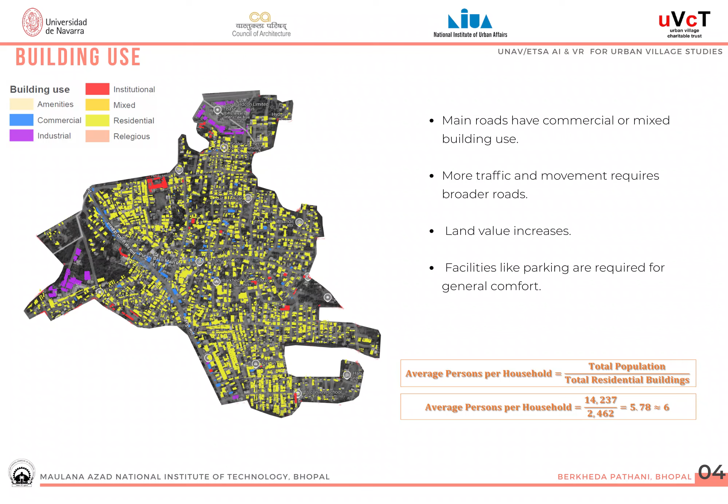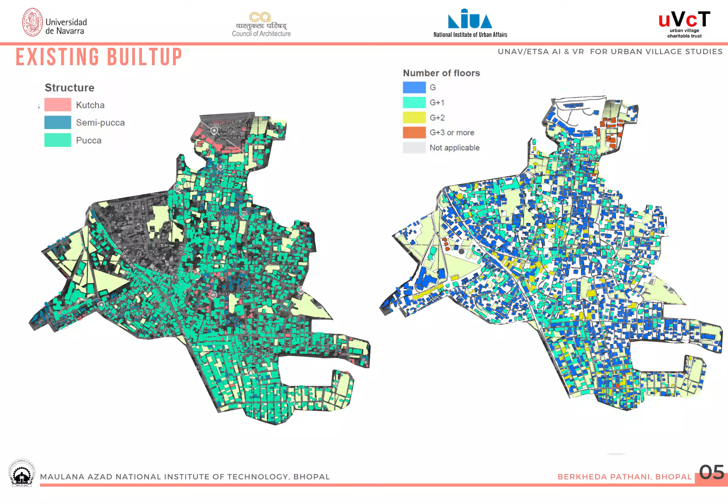Main roads feature commercial or mixed-use buildings, attracting higher traffic and pedestrian movement. This calls for wider roads to manage flow efficiently, as accessibility improves and land values rise, making these areas more desirable. With increased activity, essential facilities like parking become critical to ensure convenience and comfort for residents and visitors alike.

Buildings along major roads in this area are mostly pucca and limited to ground or G+1 floors. Government institutions like schools and anganwadis are typically single story, while private ones often have multiple floors. Newer constructions, especially mixed-use buildings, usually have 2 or more floors, with commercial on the ground and residential above. Industrial buildings, however, are often kutcha and temporary.

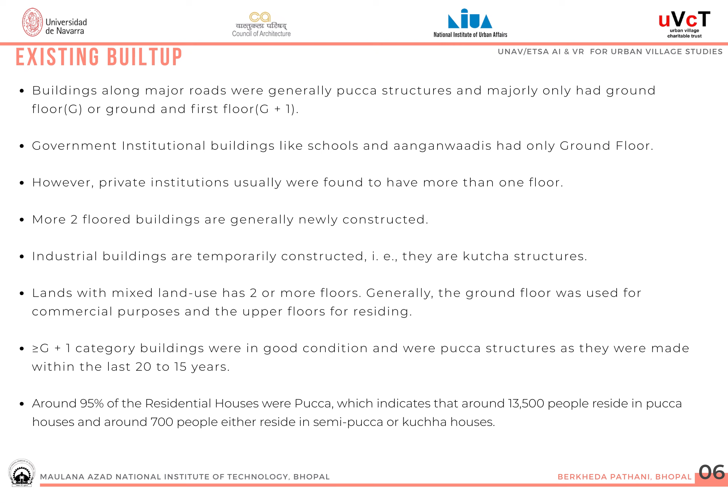Overall, 95% of residents, around 13,500 people, live in pucca houses, reflecting strong structural development in the area. Now let's have a look at the housing conditions in Barkheda. The housing conditions in this area vary across 4 categories.

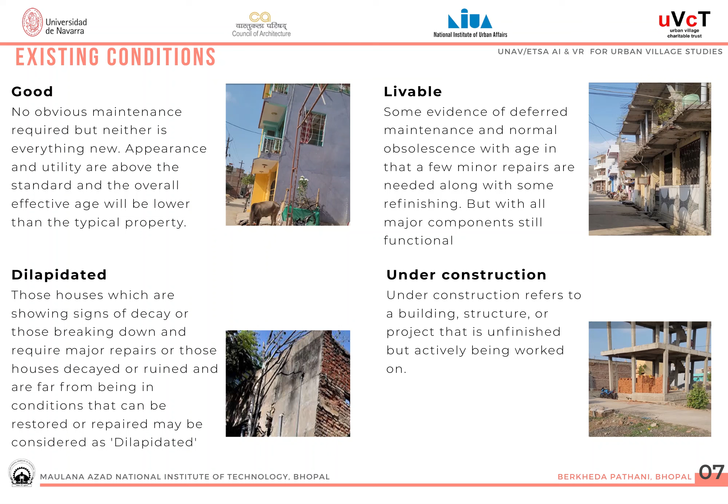Good homes are structurally sound with above-standard utility and appearance. Livable houses may show signs of aging or minor repairs but remain fully functional. Dilapidated structures are severely damaged and require major repairs, often beyond restoration. Lastly, under-construction buildings are actively being built but not yet complete, indicating ongoing development in the area.

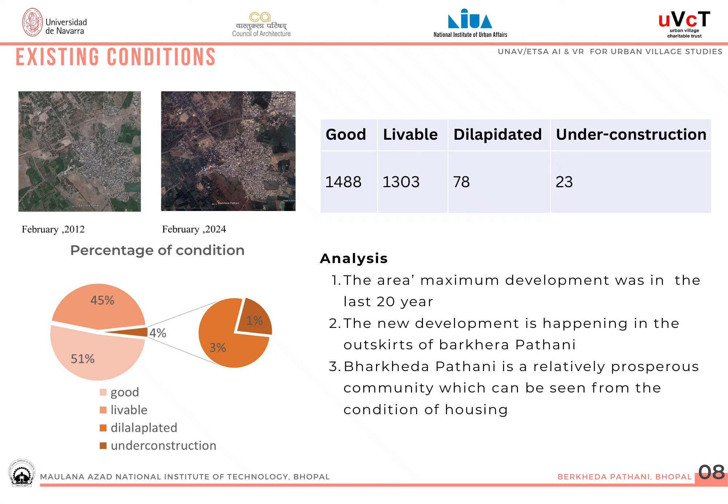As we can see in the image from 2012 compared to that of 2024, a major difference can be seen. The intensity of infrastructure and public common spaces have more prominently emerged in the area. According to the pie chart, approximately 51% of homes are structurally sound, about 45% are livable, and 3% are dilapidated.

Under the UNAV/ETSA initiative for urban village studies using AI and VR, we analyze the existing conditions in this area. Public buildings are government owned and managed, while private buildings belong to individuals or businesses. Historically, most residents lived in the northern and southern ends of the area. Over the last 20 years, settlement gradually expanded into the central parts, reflecting organic urban growth and evolving land use patterns.

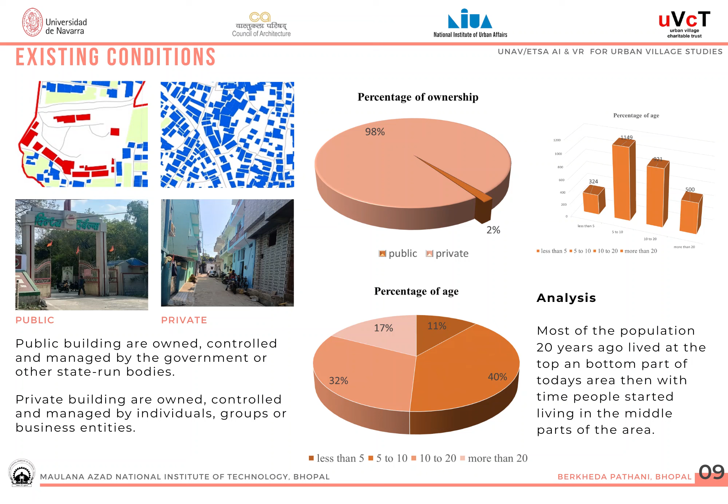Now, talking about transportation and public accessible areas, road widths in Barkheda range from 1 to 9 meters, with most falling between 2 to 5 meters. Roads are categorized into primary roads of 6 to 8 meters, secondary roads of 3 to 5 meters, and tertiary roads of 1 to 2 meters. The total road length is approximately 25.3 kilometers.

Notably, roads just 1 meter wide restrict movement to only bicycles and two-wheelers, limiting access for larger vehicles in certain parts of the area.

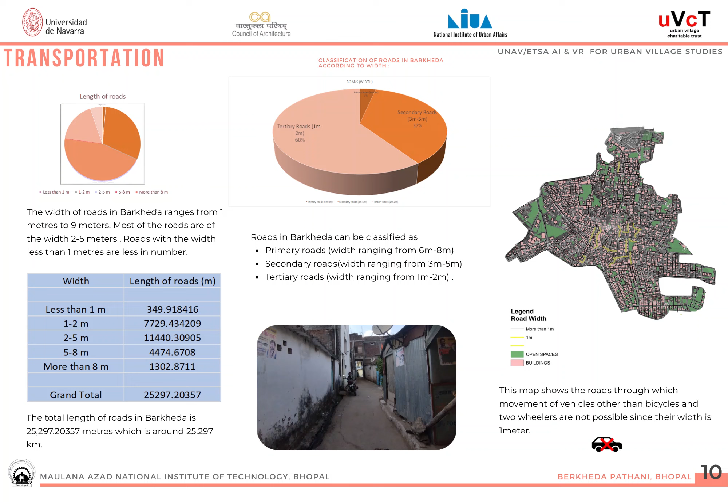As per the URDPFI guidelines and the Bhopal Development Plan, Barkheda's roads are classified into arterial, subarterial, sector, and local roads. Right of way varies; local streets range from 12 to 20 meters, while national highways require a minimum of 90 meters.

Most roads in Barkheda are paved with concrete, and street parking dominates the area, with vehicles commonly parked along the roadsides. A few areas offer off-street parking, but even there, street parking remains the norm.

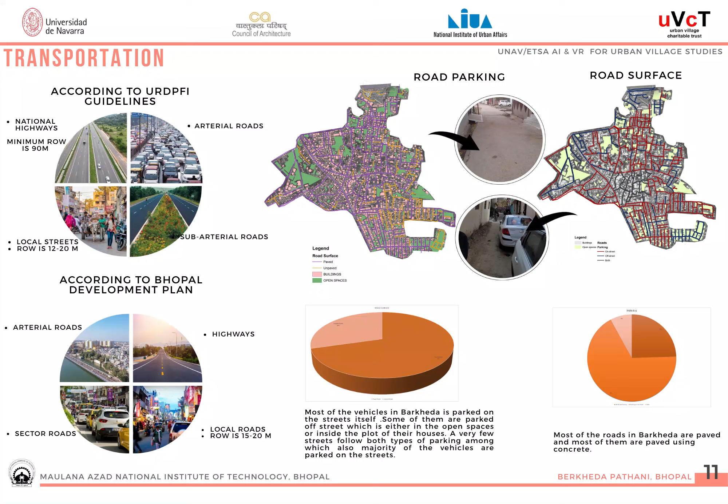Now let's explore the different sections of the road in Barkheda. Understanding the classification and design of these road sections is essential for planning traffic flow, infrastructure development, and urban growth in the area.

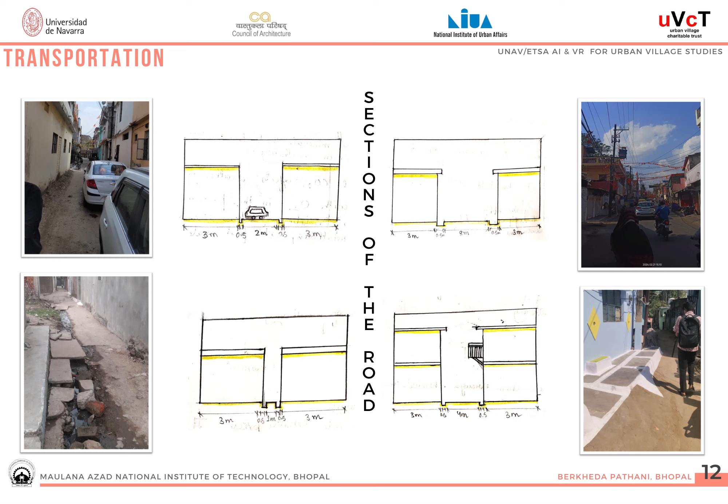So let's have a look at some data we have collected from the area. The total population of Barkheda was around 14,237, with 277 families having either bicycle, two-wheeled, or four-wheeled vehicles for transportation. This survey found that the number of four-wheelers is less due to the width of road.

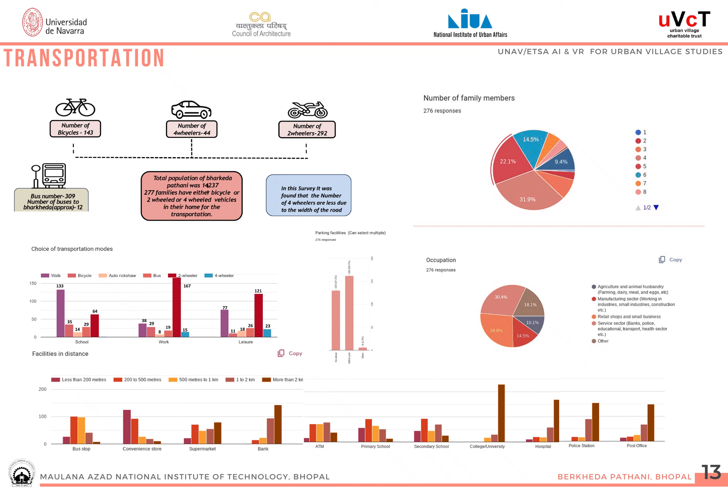Apart from this, we have collected various data by analyzing the different professions and their preferred mode of transportation in the form of pie charts and bar graphs, as we can see.

The social infrastructure includes the policies, resources, and services that support productive, social, and economic activities such as education, healthcare, and social services. Barkheda has a population of around 14,237 people living in approximately 2,462 residential buildings, excluding mixed-use buildings. Institutional buildings, including schools, clinics, and ward office, total 48, making up just 2% of all buildings in the area, highlighting the balance between residential and essential social facilities.

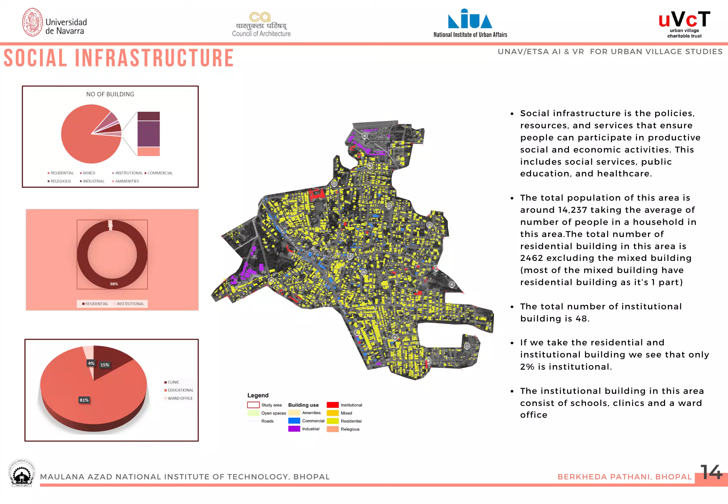Barkheda has approximately 4 clinics, with an urban primary healthcare center just 600 meters away and AIIMS located 2.1 kilometers from the area. While URDPFI guidelines don't require a dispensary here, the growing population of around 14,000 suggests a dispensary would be beneficial.

For education, the area has more than required number of schools: over 6 pre-primary, more than 3 primary, and at least 2 senior secondary schools, totaling 22 schools, which adequately serve the community's needs.

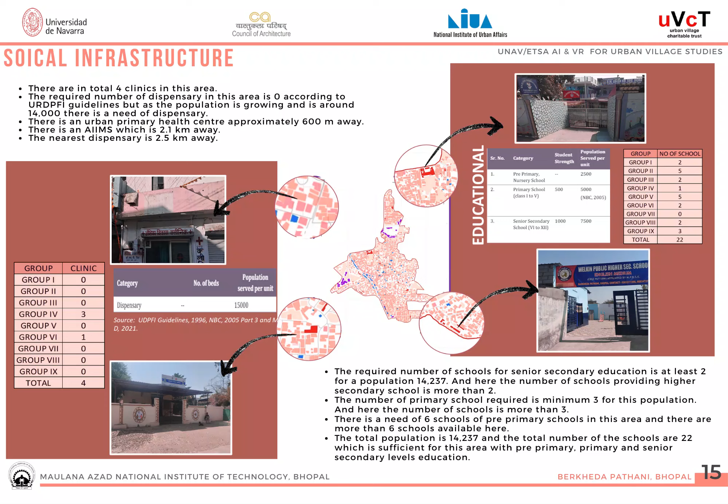Open spaces in this area are key to its urban fabric. They include regular, irregular, and incidental open spaces, the latter formed unintentionally through unplanned, random housing development. The southern part of Barkheda is more planned and features a higher number of open spaces, showing the link between planning and availability of open areas.

Many of these spaces are currently vacant plots likely to be developed soon.

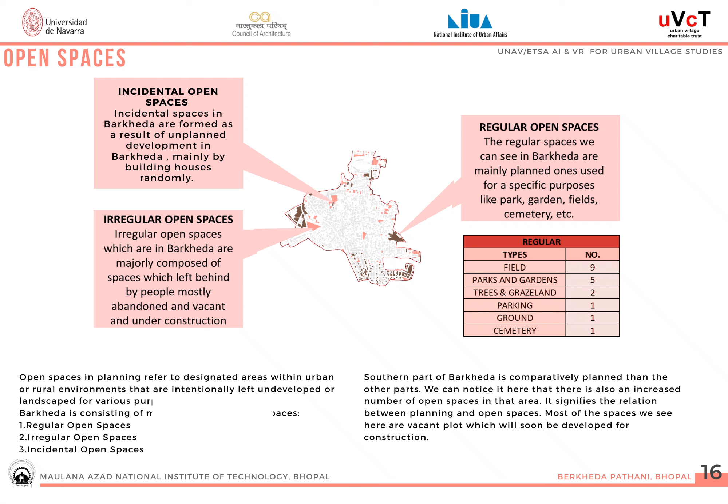Talking about the design proposals, we have proposed two projects in Barkheda: first, redevelopment of the Bajrang market, and second, redevelopment of the Barkheda ground.

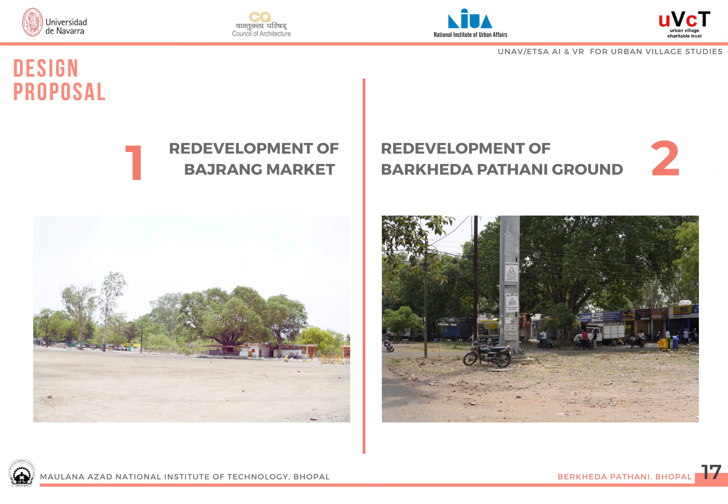The Bajrang market covers a total area of 3.9 acres, or 15,800 square meters. The site is divided into three distinct zones to optimize space and functionality. Details of the areas for Division 1, Division 2, and Division 3 will guide targeted improvements, ensuring efficient use of the site to support commercial growth and better user experience.

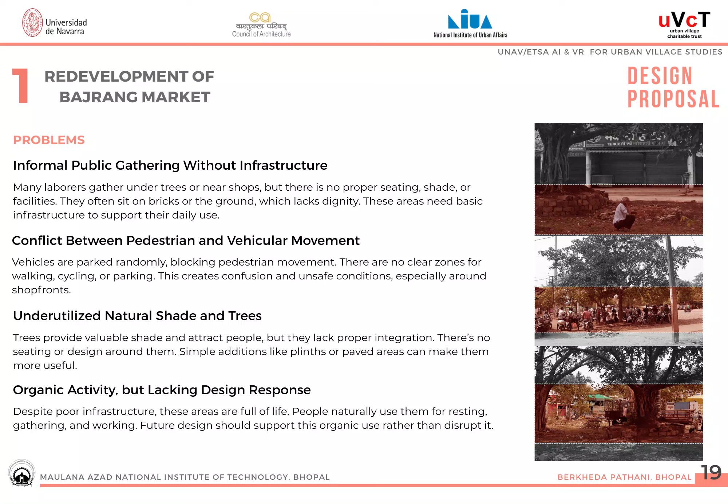The market faces several challenges. Informal public gatherings lack proper infrastructure, forcing laborers to sit uncomfortably without seating or shade. Pedestrian and vehicular movement conflict due to random parking and no clear walking or cycling zones, creating unsafe conditions. Natural shade from trees is unutilized, missing opportunities for comfortable sitting and gathering spots.

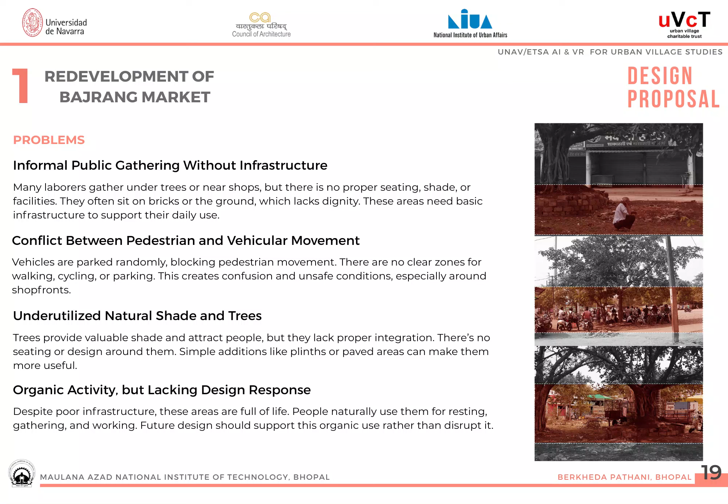Despite these issues, the market remains lively, so the future designs should enhance this organic activity while addressing the infrastructure needs. We have proposed a plan for the Bajrang market, keeping in mind the needs of people and addressing the public accessibility issues.

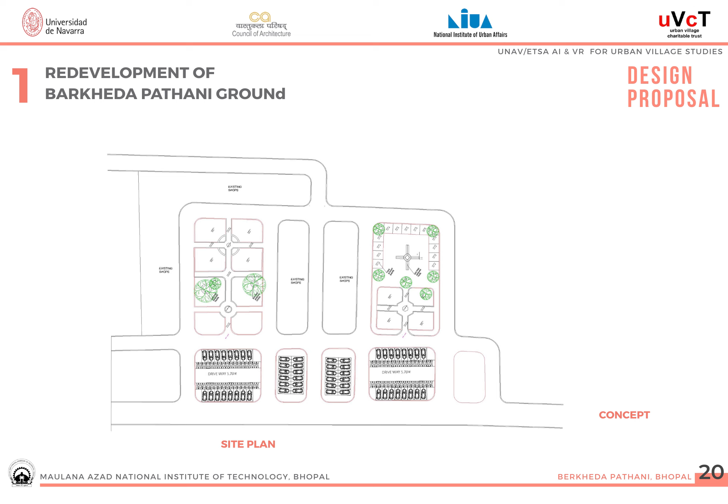We have provided proper parking areas for 2 and 4-wheeler parking, giving a comfortable 5.6-meter driveway. Also, creating interesting pathways for distributing crowd and making the place more accessible.

Let's look at the before and after renders of the marketplace, which were taken in Lumion and recreated by AI Render Studio, showcasing how AI tools can help architects rethink and visualize better infrastructure scenarios.

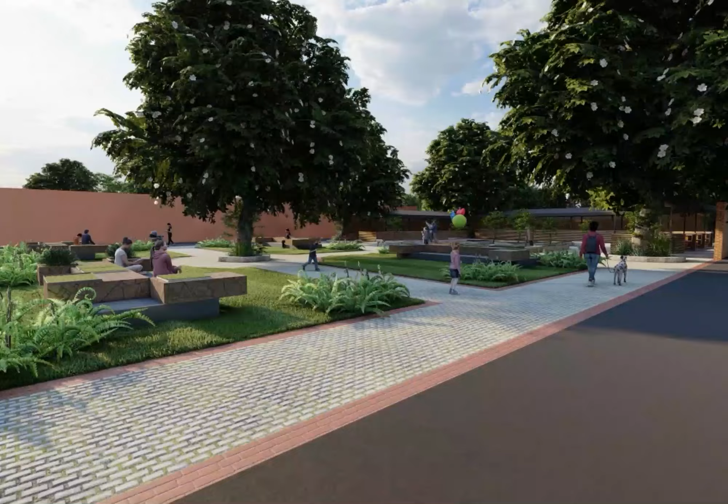Now we'll take a glance at the virtual simulation environment created with the help of rendering software.

So now we'll see the application of our design proposals in MetaQuest 3.

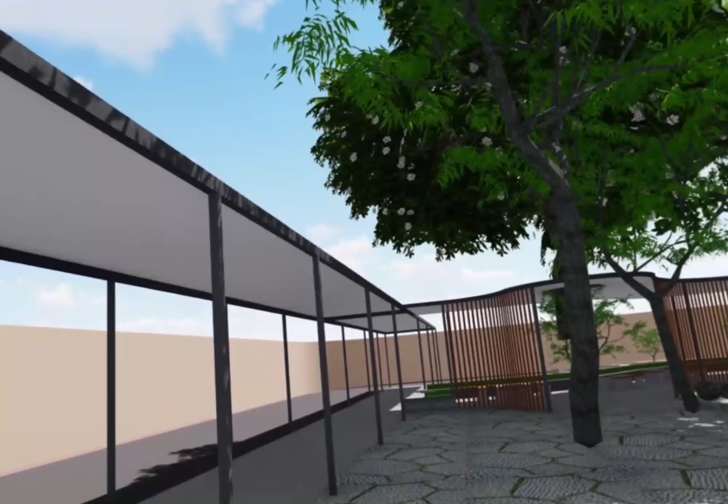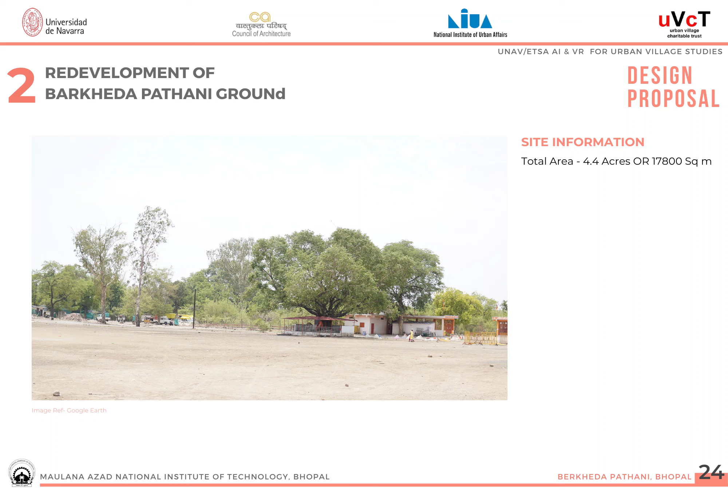The redevelopment of Barkheda Pathani ground spans a total area of 4.4 acres, or 17,800 square meters. The site is divided into three zones to better serve community needs, each designed for specific activities such as recreation, sports, and public gatherings.

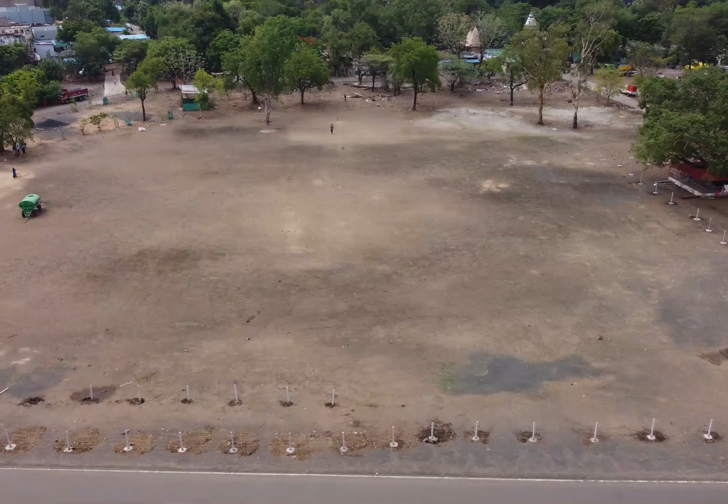This proposal aims to transform the ground into a vibrant, inclusive, and multifunctional public space for all age groups.

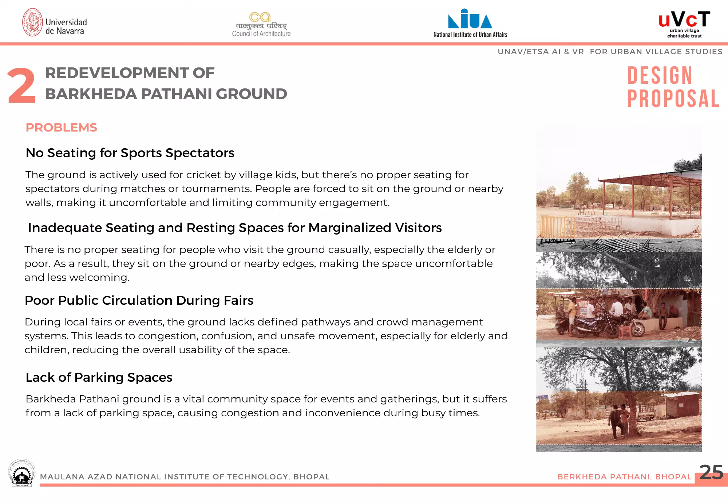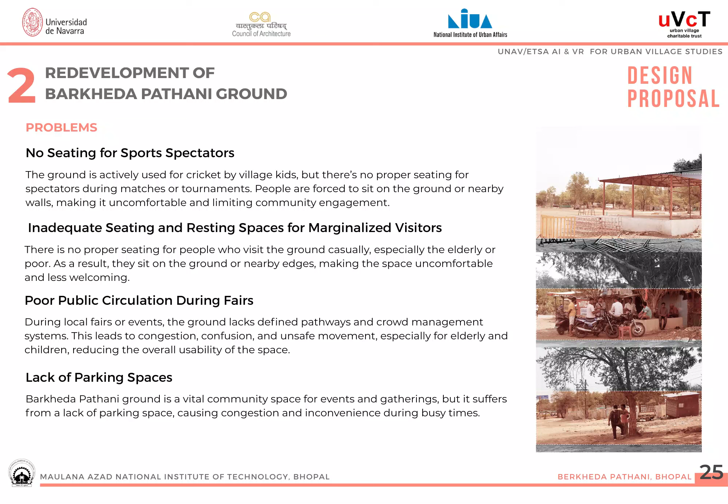The Barkheda ground, though actively used for sports and events, faces several issues. There is no proper seating for sports spectators, forcing them to sit on the ground or walls. Casual visitors, especially the elderly and marginalized, also lack resting spaces. During fairs and carnivals, poor circulation and undefined pathways lead to crowding and confusion. Additionally, the absence of designated parking creates congestion, especially during events, highlighting the urgent need for a thoughtful and inclusive redesign.

We have created a designated space for spectators by creating a colorful and vibrant pattern of structure using tensile fabric material, which acts as a sunshade, providing convenient seating as well as interactive space for the people. Also, stepped seating is installed for sports spectators, and a special area for kids provides a safe and comfortable play area for children.

Also, we have arranged various utilities which are needed for the playground to be a better interactive space, such as parking areas, small shops, and roadside street frontage developments.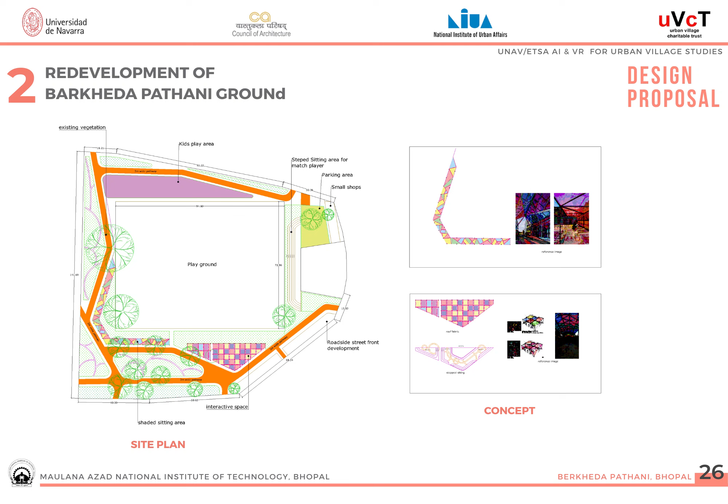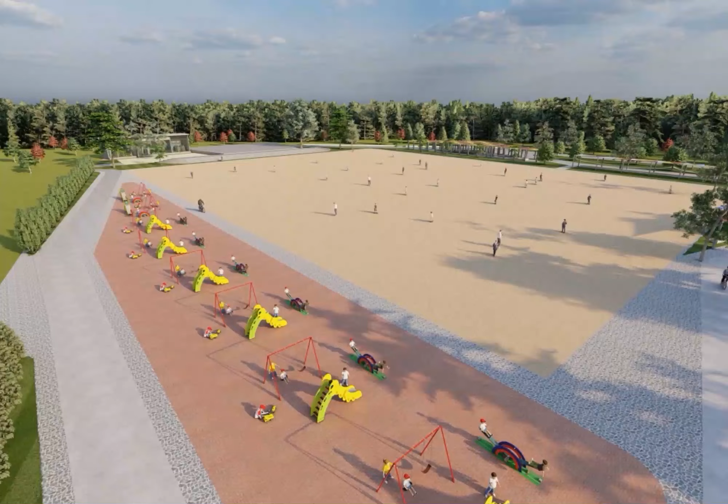Similarly, like the marketplace, we have created the Lumion renders of the Barkheda ground and their AI recreated versions. Now we'll take a glance at the virtual simulation environment created with the help of rendering software.

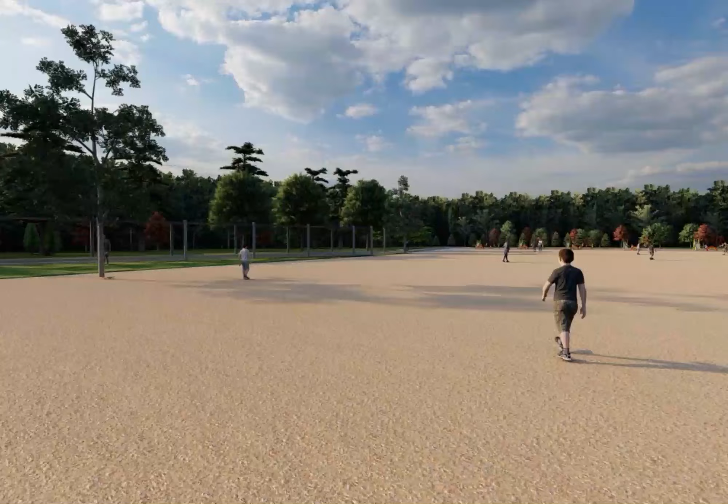So now we'll see the application of our design proposals in MetaQuest 3.

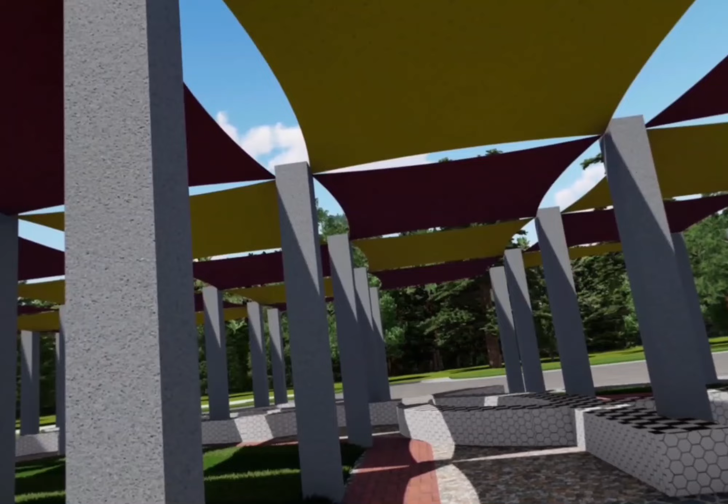Through careful observations, on-ground surveys, and community interaction, we identified the everyday challenges faced by the people of Barkheda Pathani, whether in movement, public space usage, or access to essential services. Guided by this understanding, we propose thoughtful, site-sensitive design solutions that not only address these issues but also enhance the social and spatial fabric of the village.

Our aim was to support the organic growth while creating inclusive, functional, and future-ready spaces for the people who bring Barkheda to life.